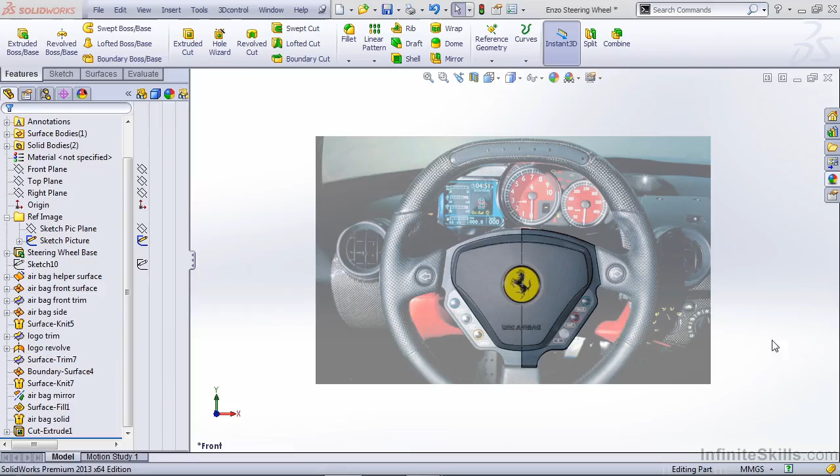In this video, we're going to focus on adding some more detail to the center of our steering wheel. In the reference image, you'll notice there are 6 buttons located at the center, and these buttons all have the same geometry and are mirrored from the left side to the right side. Since we only have half of our steering wheel base drawn, we can create 3 of the buttons, and when we mirror the part to the left side, we'll mirror that geometry as well.

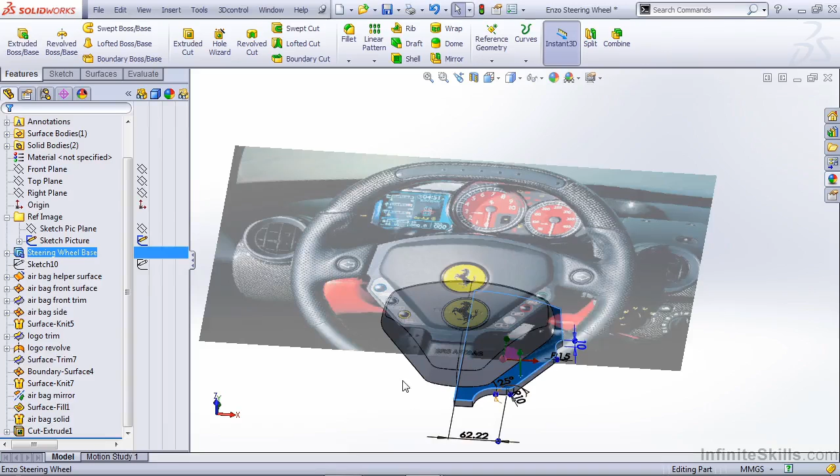Let's start by creating a sketch on the front face of our steering wheel. First, we want to create a line for construction, loosely based at the center of the 2 outside buttons. We want to make this line parallel with the outside edge, and give it a dimension. Looks like 60 millimeters is going to be pretty close to the reference image.

Next, we want to add 3 circles at each endpoint and the midpoint of our newly drawn line. We want to give all 3 of these circles an equal relation and apply a 16 millimeter dimension to them. We want to go ahead and fix the endpoint of our construction line, which fixes all the geometry in place.

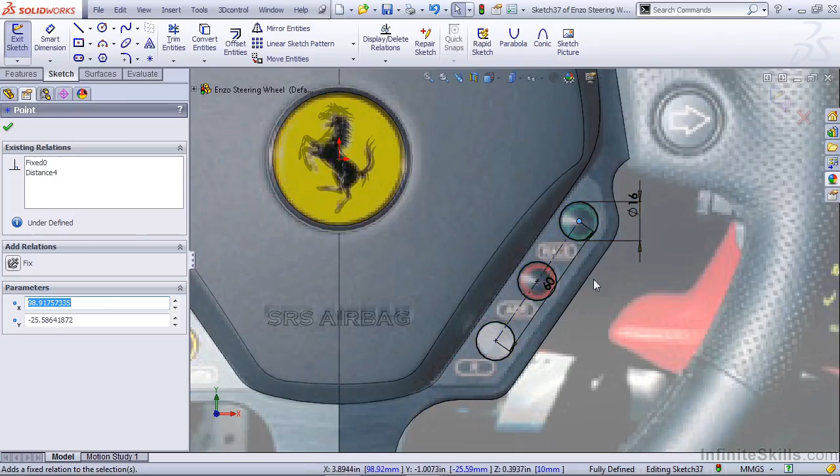We can exit the sketch and use the Curves dropdown from either our Features or our Surfaces tab to create a split line on the front face of our steering wheel base. This is going to break up the front face of our steering wheel with the 3 new buttons.

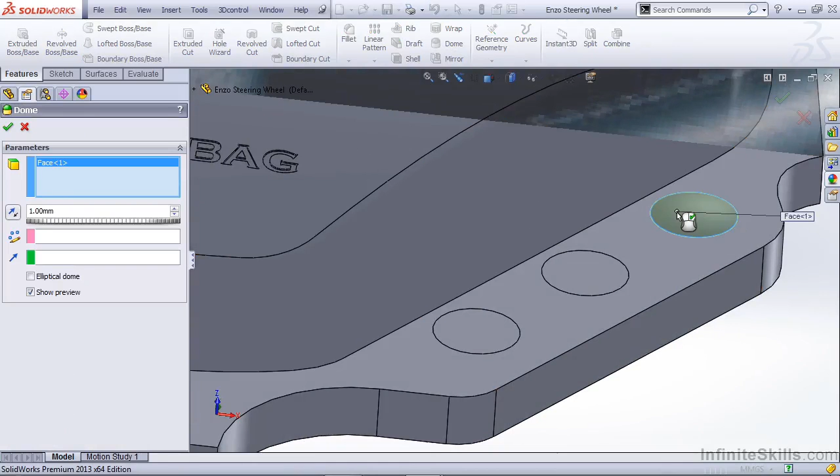The next feature we're going to use is the dome feature. It's important to note that the selection is going to drive the type of dome you create. For instance, if I select a single face, let's increase this to 2 millimeters, the dome looks nice and consistent. If we grab a secondary face, it alters the type of geometry that's being created. You'll also notice with a single selection, you have the option to do an elliptical dome.

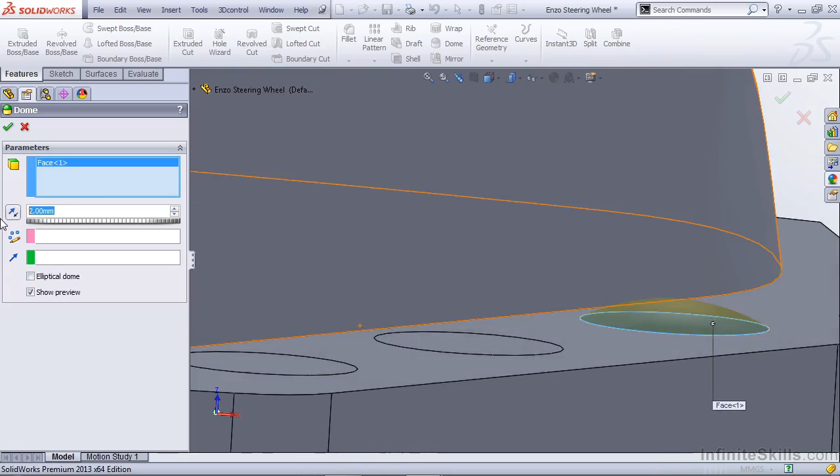For the purposes of this video, we're going to choose a 1 millimeter dimension. We're going to do a single selection, leaving the elliptical dome box deselected. Next, we're going to do a dome on each of the additional buttons that we created. And take a look at what we have.

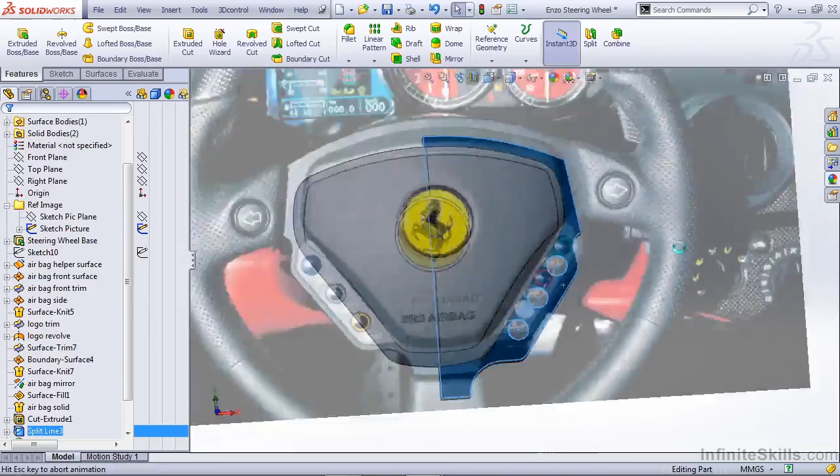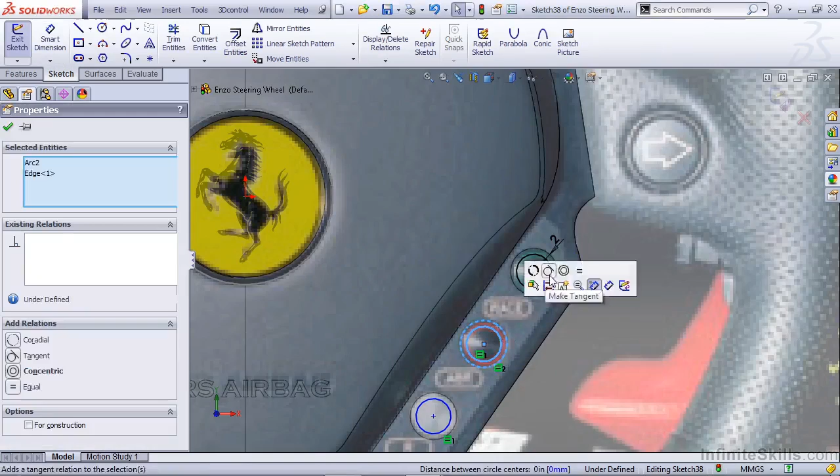The next step is to create another sketch. This time, we need to create the illuminated ring, so we want to draw 3 circles. Again, these are centered on the circles we already created for the buttons, and we're going to give them an equal relation with each other. We want to give them a dimension as well. In this case, I'm going to give it an offset dimension of 2 millimeters. We want to make sure that all of these are concentric with their associated buttons.

Once we exit, we want to again use the split line, select each of our buttons and hit OK. After we've created that dome that represents the button, you can see now we've got the illuminated ring section that will allow us to apply a lit LED material to show up in final renders as an illuminated button. Before we apply any decals, let's go ahead and create the split for the surrounding geometry of our button face.

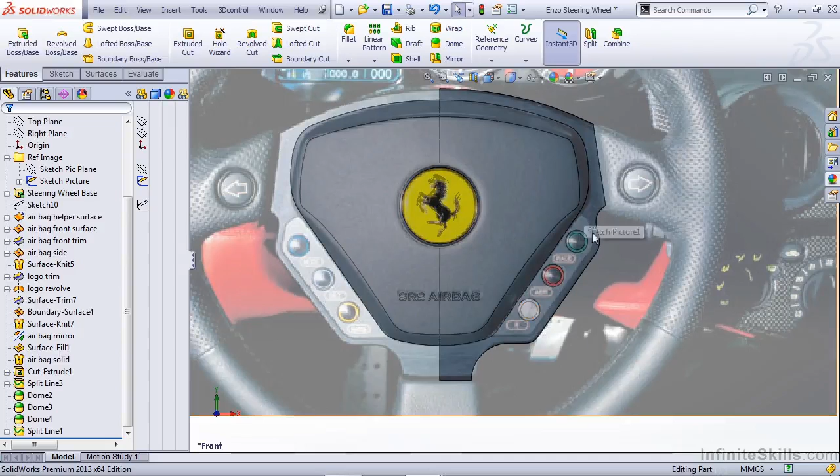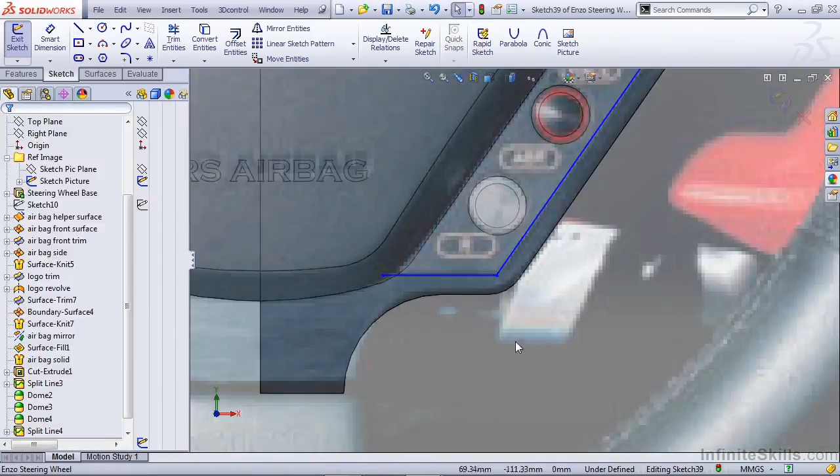Let's start a new sketch on the front face and start to draw geometry as closely as possible to the images. You'll note that I'm using all straight lines here. I want to make sure that I create a parallel relation and that everything is as close as possible to our reference image. We're going to go back and apply fillets to the corners, but I want to make sure everything is appropriate. For instance, let's make a perpendicular relation between our parallel line and this upper edge.

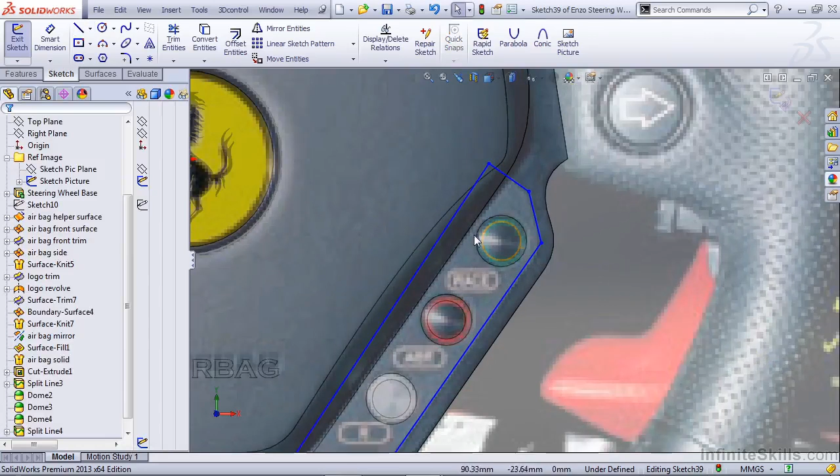Next thing we want to do is close this sketch. We're going to need a closed profile to create a split line on the face of our steering wheel base. Ultimately, it doesn't matter as long as this line is inside the profile of our airbag, because eventually we're going to knit everything together or combine them if they're solids.

Next, let's go ahead and apply some fillets. So we're going to use a sketch fillet option, starting at the bottom left, apply a 10 millimeter radius, move our way to the top right. 10 millimeter looks good there as well.

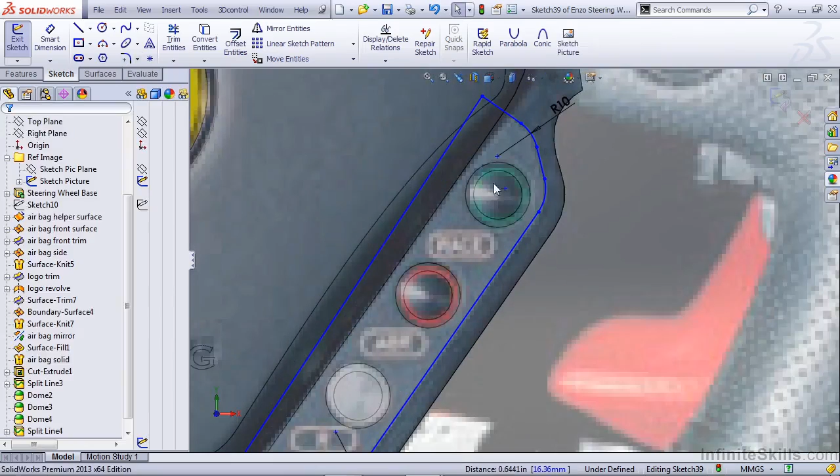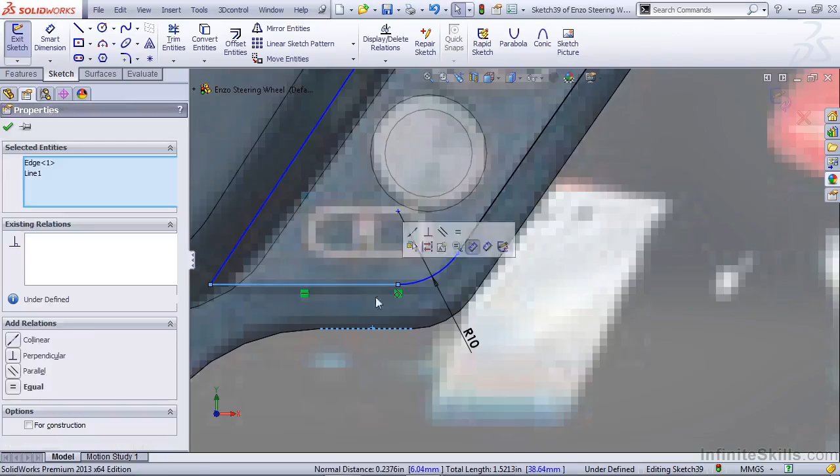Another thing we can do is make sure that these are concentric, which makes sure our images are lined up. Again, we can do that at the bottom as well, make sure these are concentric, but this produces an error because of the size of our fillet radius. So if we undo that, we just need to be sure that everything looks as close as possible to our reference image.

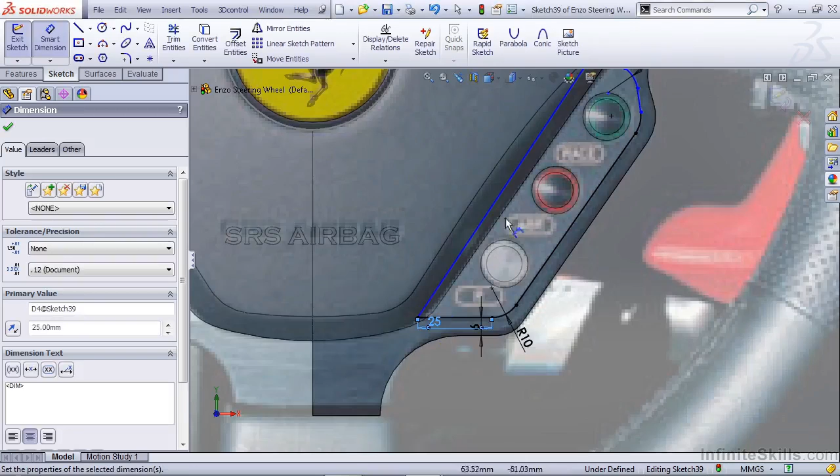We can give offset dimensions based on this as well if we want to get it as close as possible. For our purposes, I'm going to give this a dimension from this line to this straight reference line, 6 millimeters. As I mentioned, this inside line doesn't necessarily matter as long as it's within the profile of our airbag. So let's give this a 25 millimeter length, and that will put that inside of our profile. Let's give this endpoint a dimension of 15.5 millimeters, and we want to give this an angle dimension, 135. That puts everything fairly close.

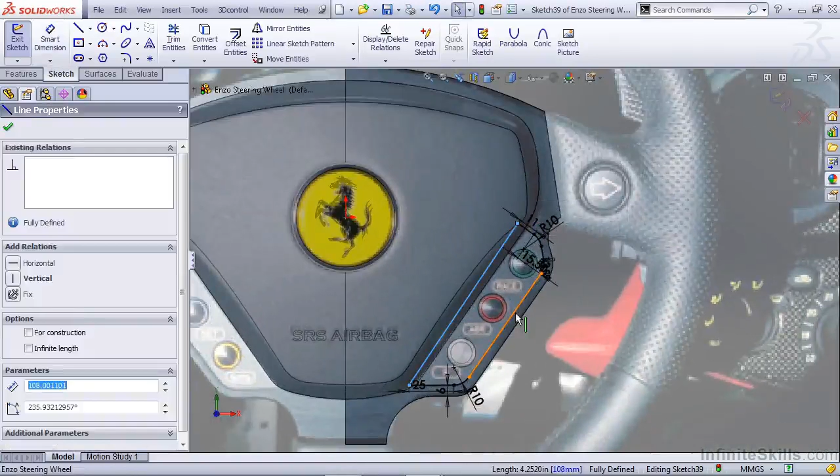The last thing we need to do is create a dimension for this line, give it 11 millimeters. You could also add a parallel relation between this line and this line, that would fix it as well. Let's exit the sketch, again go to our Curves dropdown, use Split Line, create another split line on the face of our steering wheel.

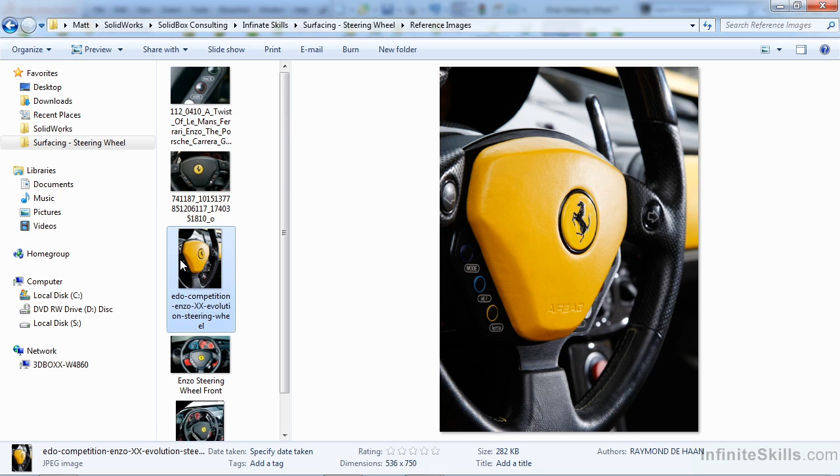This gives us a section where we can change the material to replicate the material located on the face of our steering wheel image. We will have to take a look at reference images to be sure that we have the correct decals. Provided in the tutorial are decals for each of the buttons, which we'll go over in a future video. We also have reference images that will show you how the buttons are illuminated and how the decals are placed under each of those. These reference images are going to be important to make sure that we get the colors and the location of each button properly. That concludes creating buttons on our steering wheel base.